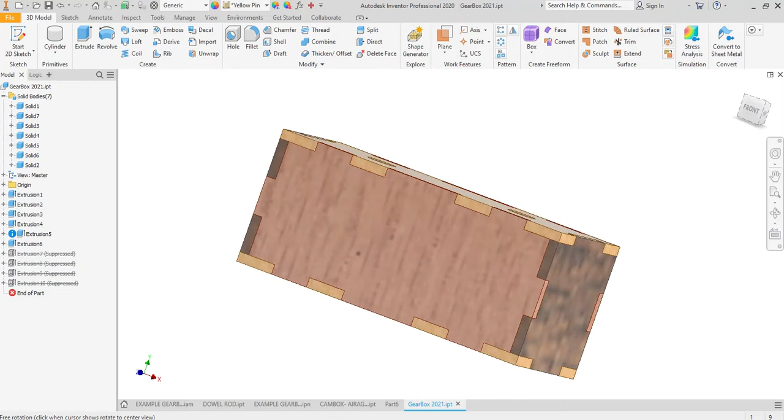This is the last step for creating your cam box. Now, I would like for you to actually cut out at least your name on one side, so you have your name and everything on yours. Now, what you do with the other sides is up to you.

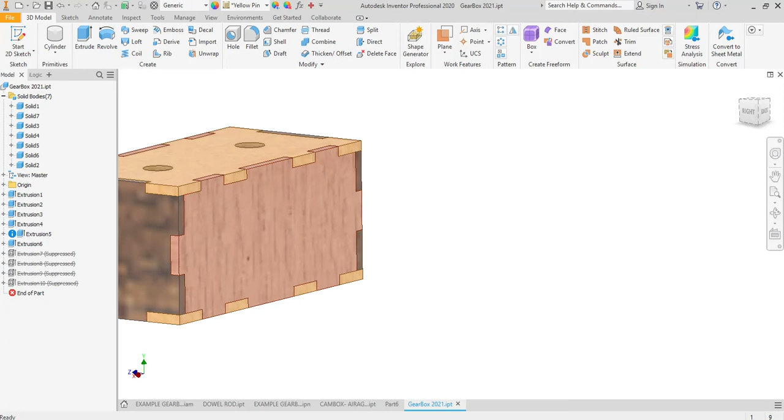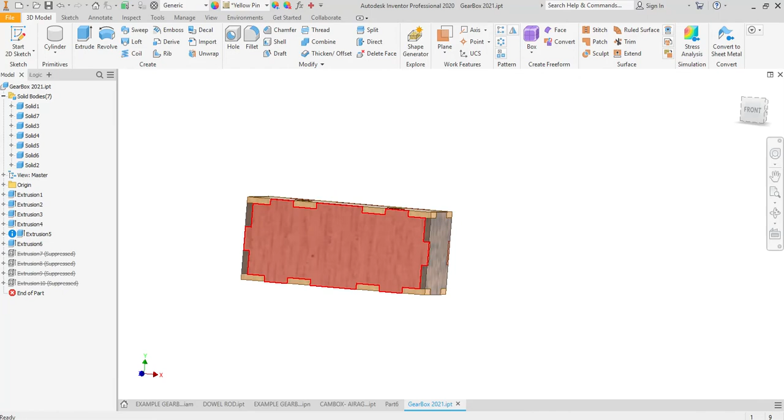If you wanted to draw a symbol, I chose a little gear on one side, and then I wrote gears on the other side. If you wanted to cut out your favorite school logo or some video game logo, when you cut it, just make sure that any spaces that would fall out, you support it, and anything you draw is at least 1/16 of an inch thick, so it doesn't break and fall out.

But what I want you to do is focus on using stencil text, okay? So when you create your sketch here, we go to text, okay, let's start with just a regular text. So I'm going to write Airaghi, and you can bold it or whatever, but you want it to be big enough that when it cuts out, it looks good.

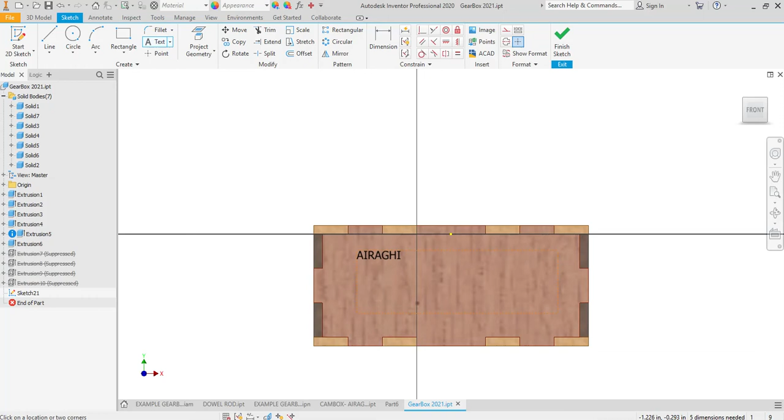Don't just make it really tiny like this and cut a little tiny piece out, because it's not going to look good. So we're going to take this and I'm going to highlight the text. Let's say, I don't know, let's start with 0.5 and we'll go from there. You have to highlight the text to change the text height.

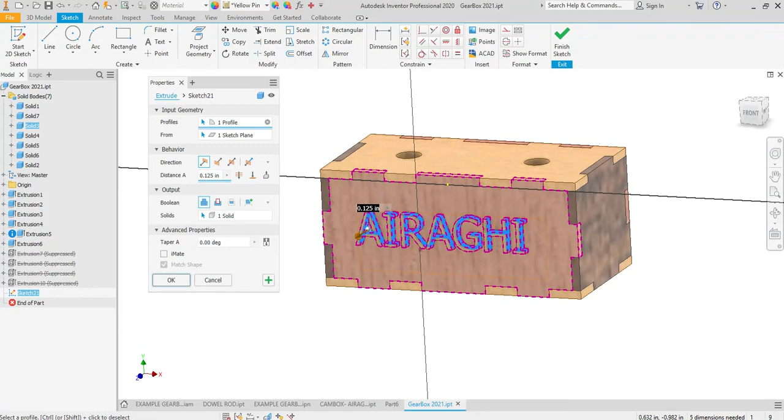This is reasonable, I could actually go a lot bigger, but here's what I want you to understand. If I cut this out of this front piece, and we cut it and say okay... wait, did that not go all the way through? It should have. Just make sure that it does, so you can actually see. Yeah, I think it does.

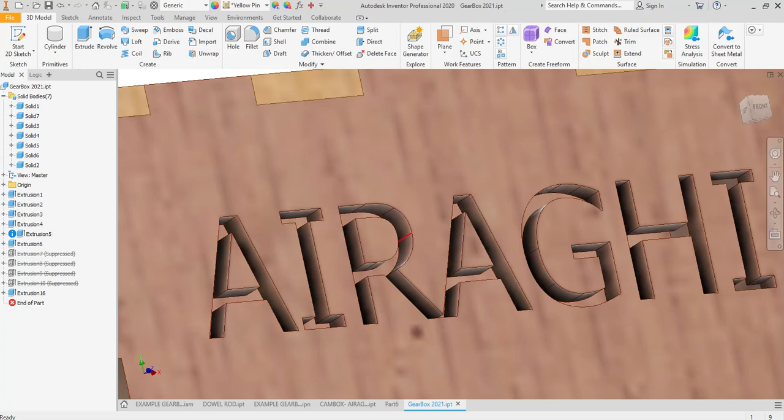So when this cuts with this A, this is going to go away. This is going to be gone. This is going to be gone. And anything that has a little piece in the middle will go away.

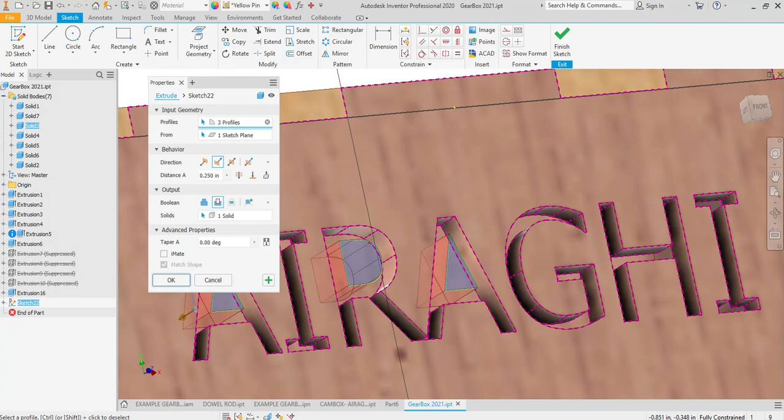So I'm just going to show you what I mean. I'm going to create a sketch here, project this, this, and this, and extrude it, and cut it. And this is exactly what's going to happen when you go to do it. It's going to look like this.

Now, if you're okay with that, that's fine, but it won't look like actual text, it'll look like something left out. And that's up to you. If you want it to look like that, that's fine. But what I'm going to do instead is go into this sketch right here, and change this.

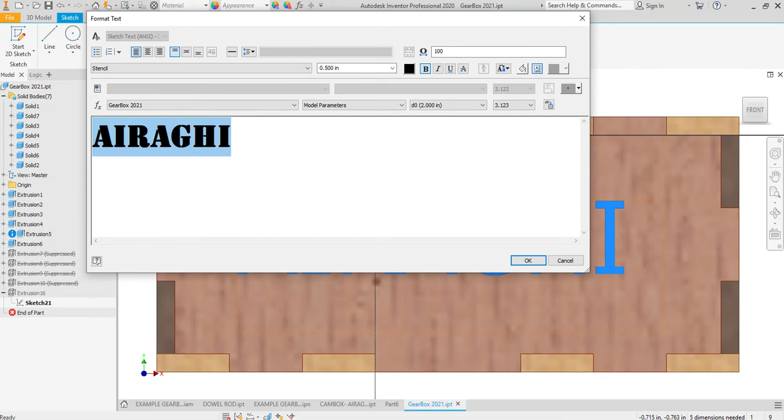Inventor, and almost all school computers, have a stencil text called Stencil. When you click on it, it looks like this. You can't really bold this because it makes it smudged and it doesn't cut well. But when you do it, this is the way it's going to cut out, and this is the way it's going to look.

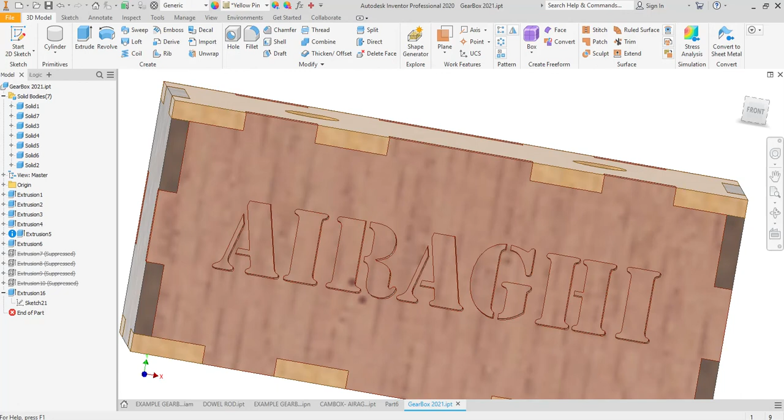Now I'm going to show you something else that's really cool. If you don't like this stencil text, this is your only option otherwise. What I'm going to do is pull up this, and I want to show you.

I typed in Stencil TTF. TTF stands for True Type Font, a font you can bring into your computer and use. The one I like to go through, because it's easy to download these, is Font Squirrel, works pretty well. Each one of these says download OTF.

That one doesn't work, download OTF. This one with all the dots doesn't work because all those dots will fall away. But let's say you want to use Black Ops, you can go to download TTF, or Boston Traffic, download TTF. This one doesn't work because it has a bunch of dots on it.

Cheddar Gothic. The one that I personally like is, where is it? It is called Lintsec, that one's pretty cool. The one I use a lot is, where the heck is it? It is, I think I passed it, oh it's under S. That's right, oh it's not on here. But Octane Stencil, that one works pretty well.

So anyway, watch this. What I'm going to do is take Major Snafu, maybe this is the one I want. We go to Download TTF. It's going to come down here into a zip folder.

I'm going to go Show in Folder, and then you have to actually copy the file out of this zip folder. I'll show you, this is actually really cool. I'm going to double click on this, take this, and if you right click, see how it doesn't give you any other options? I'm going to say Copy.

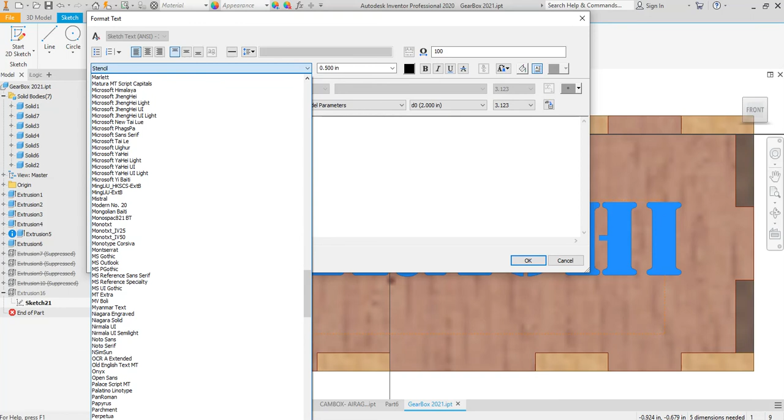And then I'm going to go into Inventor, go back to my text. Now watch this, this is really cool. I'm going to highlight this text and come up here, remember it said Major Snafu. So I'm going to go up here, M-A, Major Snafu, there it is. And I go beep and there it is.

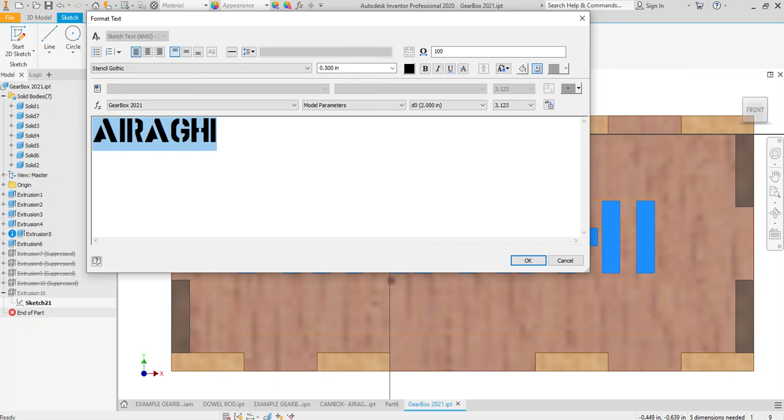And I hit OK and then I hit OK again and there is my stencil text. If you don't like that one, that's fine. The one that I found that I really like, that I use a lot actually, I couldn't find it on that Squirrel text, but it's called, where is it, Stencil Gothic. I really like this one a lot. And then you can play with the size, you can move it around, whatever you want.

And then there's your little text. So I'll show you what mine looks like. I'm just going to delete this. And in the end, I'm going to show you what my end product looks like.

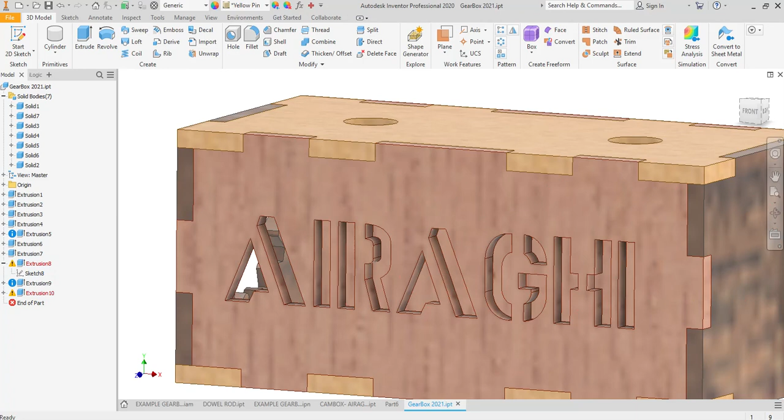So let's go to Unsuppress. Except something happened with these, but whatever. It screwed that up, why did that screw up? Okay, gears, okay, I just had to hit OK. Whatever, anyway, you can see I made a little gear thing here.

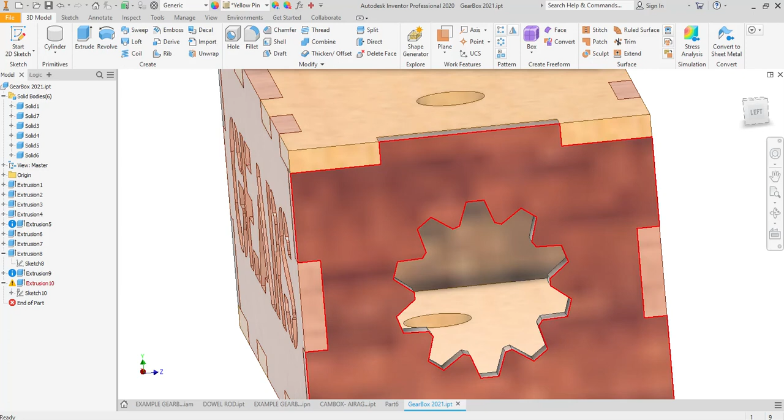I wrote gears on the back, and I wrote Airaghi on the front. I would like, I'll say this again, I would like for you to have your name on at least one side, so you can differentiate yours and you have your little desk thing that you can do. Okay, that's it, well done.